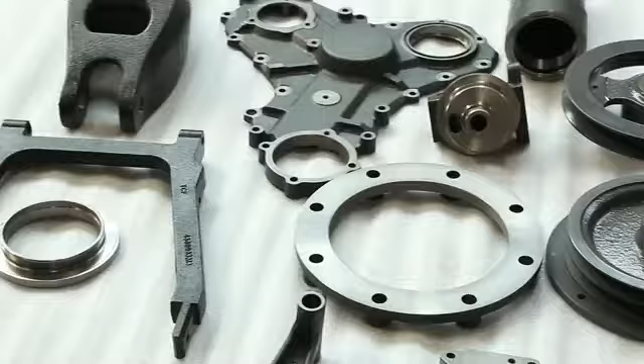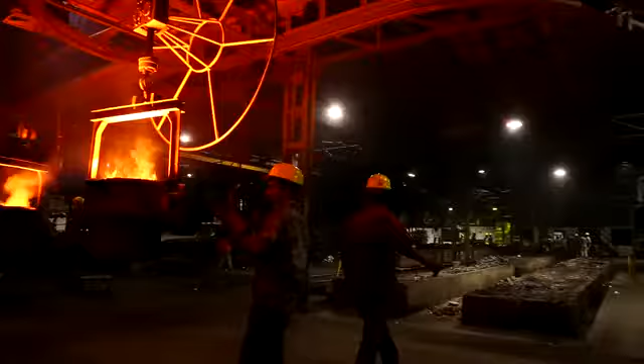Technocast Foundry is an ISO certified company specializing in manufacturing gray and ductile iron castings. An astonishing 12,000 tons capacity foundry and a spare capacity of 4,000 tons per annum. Situated in Coimbatore, considered to be the Manchester of South India for its robust industrial enterprises, Technocast Foundry stands tall among metallic manufacturers.

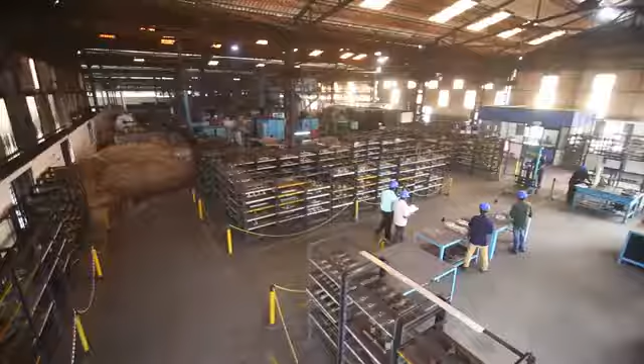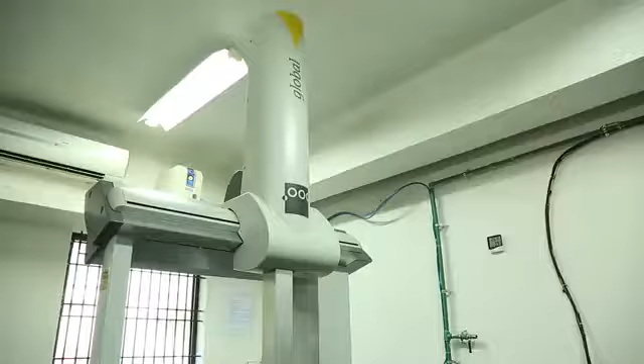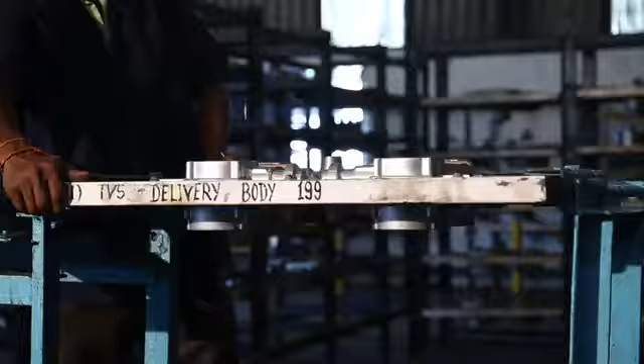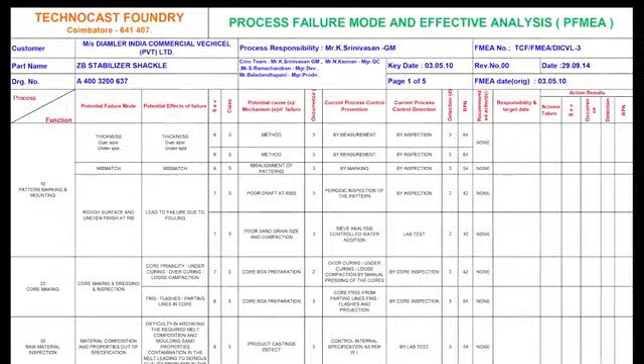Pattern Shop. The Pattern Shop is fitted with tool development supported with CAD/CAM and AutoCast simulation software facilities that minimize the development time and improve efficiency. CMM that inspects the first sample dimensions. To keep track of the patterns, we maintain an efficient pattern storage area. We are capable of submitting all the parts with APQP, FMEA, Control Plan, SPC, MSA, PSW and PPAP.

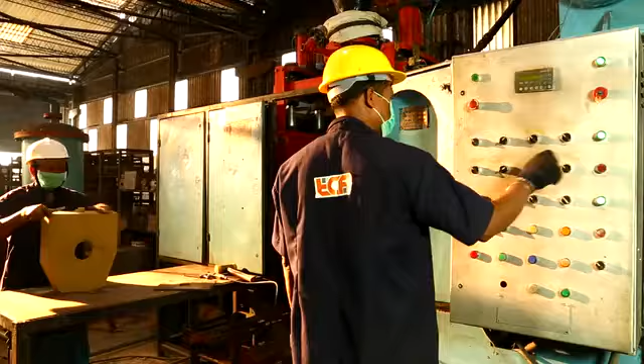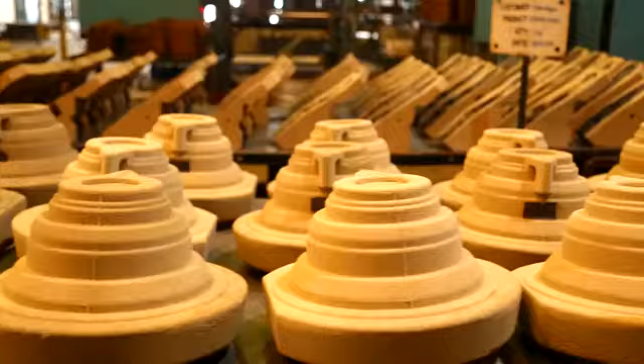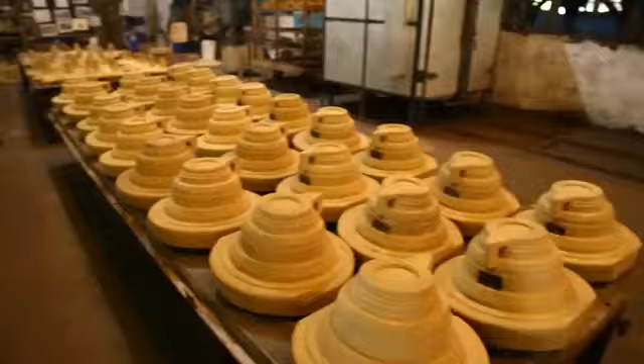Core Shop. The Core Shop contains a shell core shooter with a capacity of 5 kilograms, cold box core shooters of 5 kilograms, 10 kilograms and 15 kilograms capacity, and a core sand dryer with a capacity of 2 tons per hour, heating oven for baking the cores, and proper storage provisions of the cores.

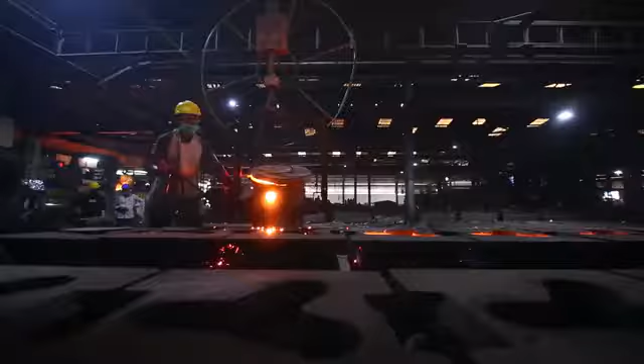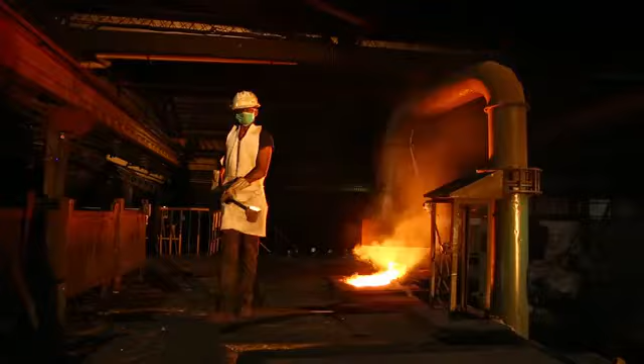Melting Shop. The melting shop comprises 2 medium frequency induction furnaces of Inductotherm make, 3-ton EOT cranes with 1-ton treatment ladles, automatic timer that monitors the pouring time for SG iron castings, digital display of spectral results in the melting platform, and grade-wise storage of inoculants.

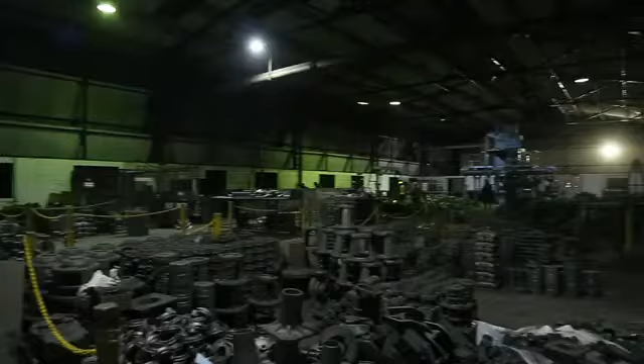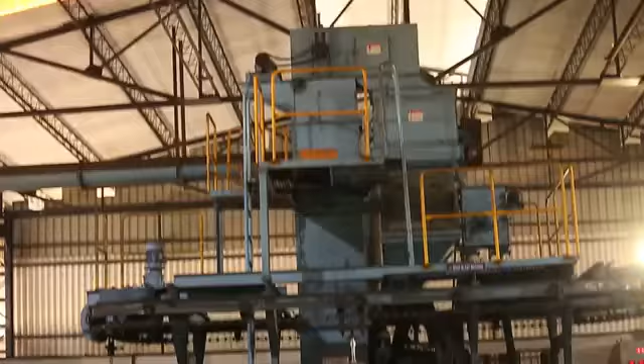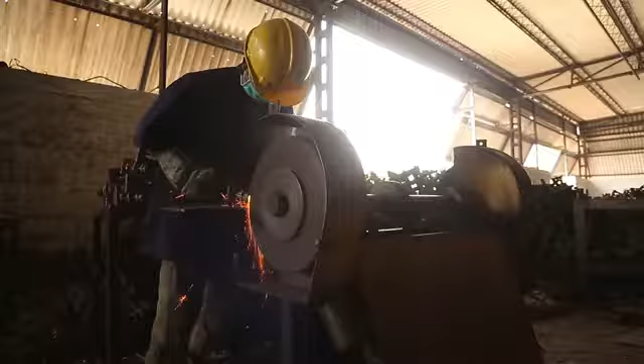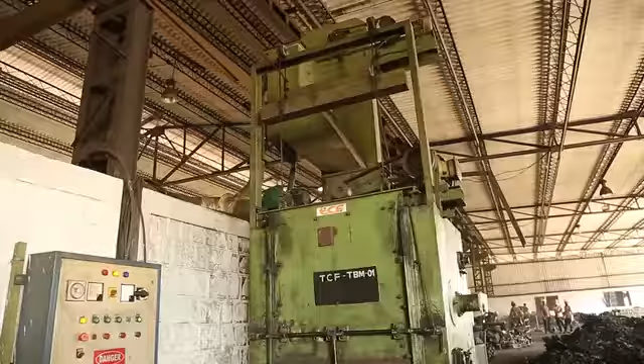Fettling Shop. A high-end fettling shop with a work area of 2,400 square meters, making sure the post-production processes take place effectively. The fettling shop is incorporated with 2 numbers of 500 kilogram capacity shot blasting machines, 10 bench grinders, 2 swing frame grinders supported by a combination of pneumatic grinders, 60-ton capacity trimming machines, 300 kilograms capacity tumble blasting machines, and nozzle blasting machines that clean intricate and complex core holes.

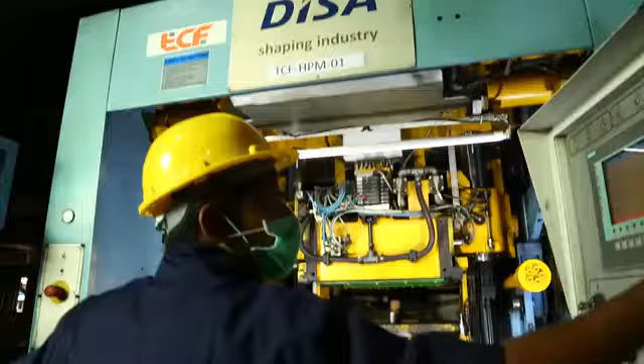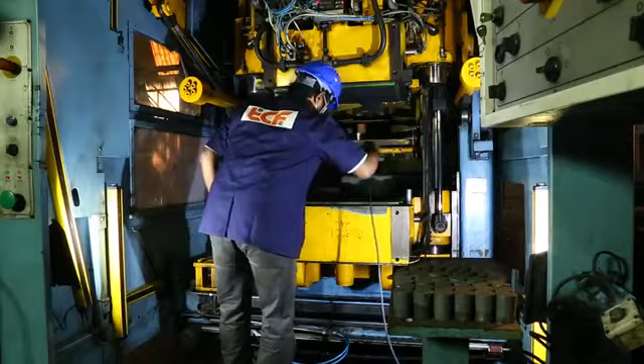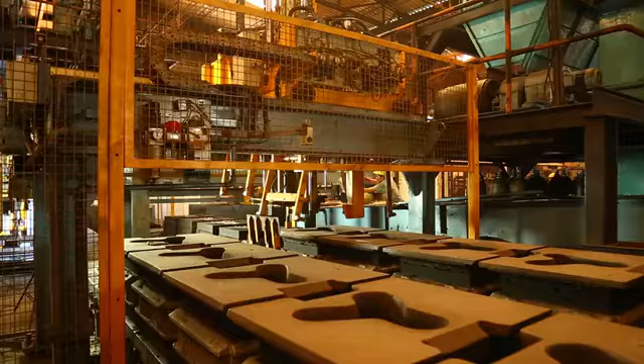High pressure molding line. Technocast Foundry has invested in state-of-the-art machinery such as the DISA Match 20x24 with automatic core setter for producing molds with exceptional dimensional accuracy and superior surface finish. Highly intricate castings are possible in a very short span of time using the DISA HPML molding technology with a high productivity rate of up to 180 molds per hour.

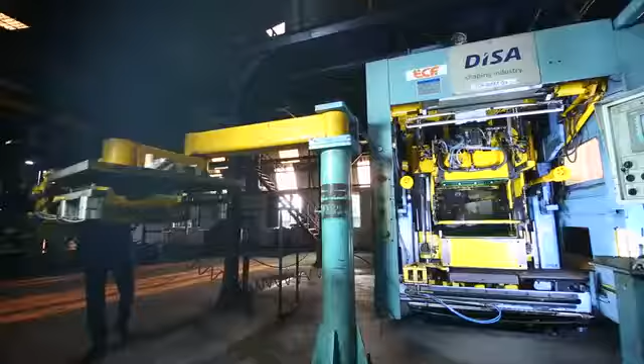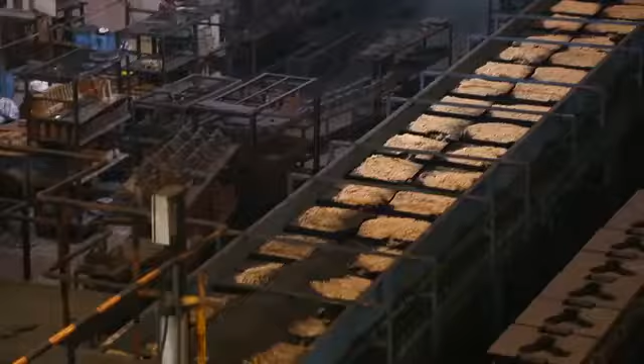Complicated self-core castings, which require meticulous and time-consuming effort, are easily developed with this technology with no or very minimal mismatch rates. Change in patterns is easily done without loss of production with the help of the quick pattern changing device. This allows us to manufacture products of all volumes without hindering the productivity rate.

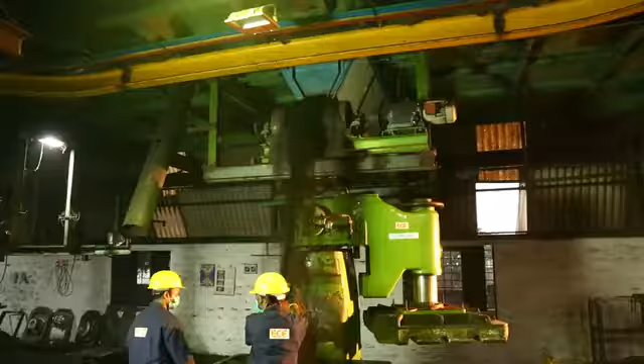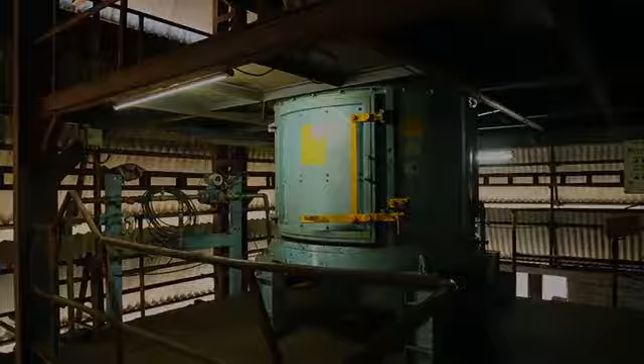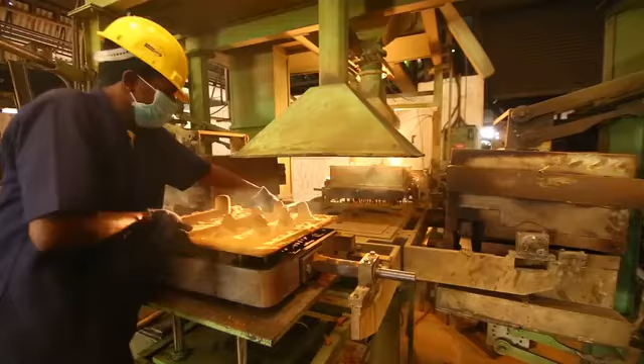Sand plant. The automatic high pressure molding line is optimized with a 40-ton per hour sand plant with a complete dust collection system. Shell molding. 2 4-station shell molding machines are used to manufacture components varying from a weight range of 100 grams to 20 kilograms with mold size dimensions of 480 millimeters by 600 millimeters, with a capacity to produce 1,200 molds per day per machine.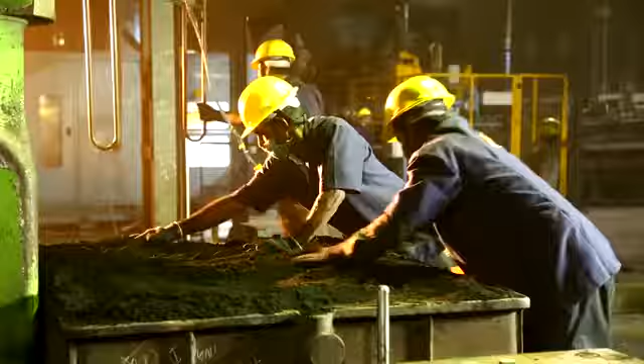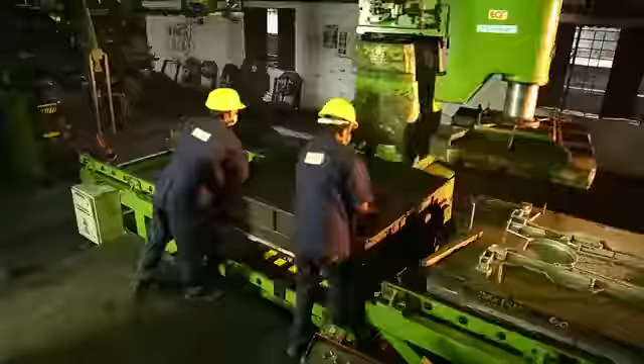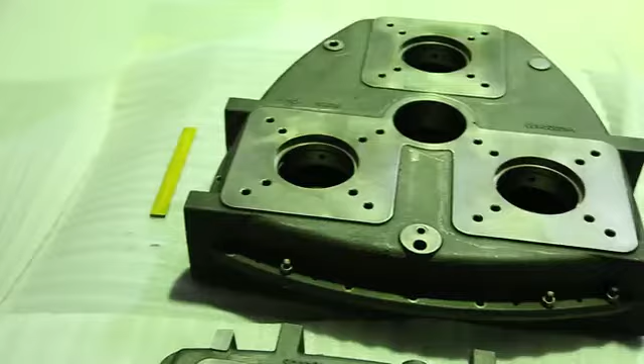The ARPA 450, ARPA 1300. The ARPA 1300 simultaneous jolt squeeze machines can handle box sizes of 1000 by 1200 by 350 millimeters by 2 with the capacity to produce single piece castings that weigh up to 350 kilograms. The DISA ARPA 450 can handle box size of 650 by 700 by 200 millimeters by 2 with the capacity to produce single piece castings that weigh up to 100 kilograms.

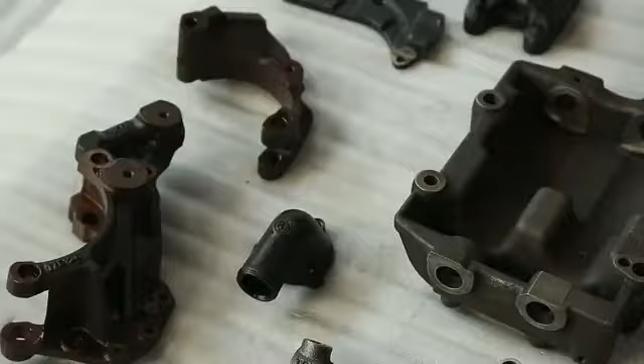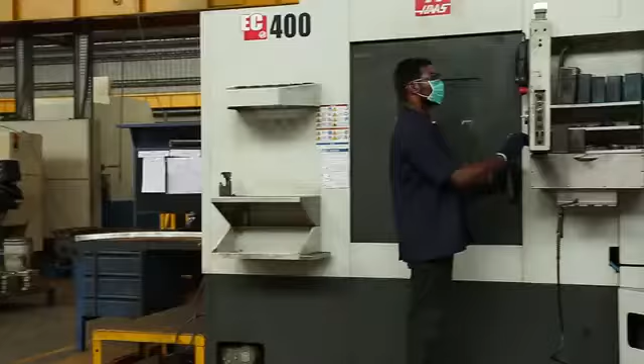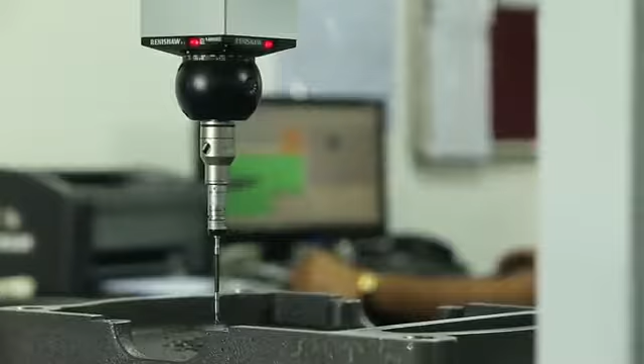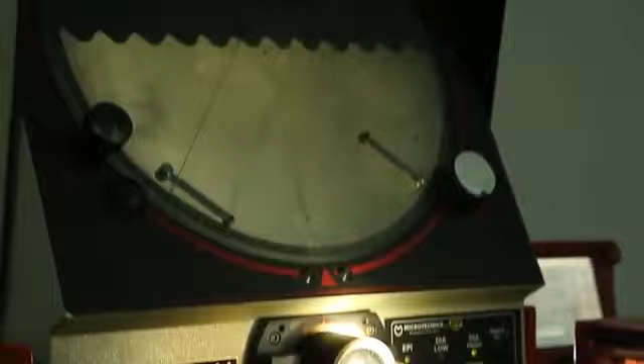Machine shop. The machine shop is geared with 28 CNC machines working round the clock. The machines include 2 HMCs of Doosan and Haas USA make, VTL of Doosan and Hwacheon make, 15 VMC, 9 turning centers, a dynamic balancing machine and a high pressure jet washing machine, CMM of Brown and Sharpe make with a size of 700 millimeters by 1000 millimeters by 660 millimeters, 2D Height Master of Electronica make, a profile projector and surface roughness tester for Ra inspection.

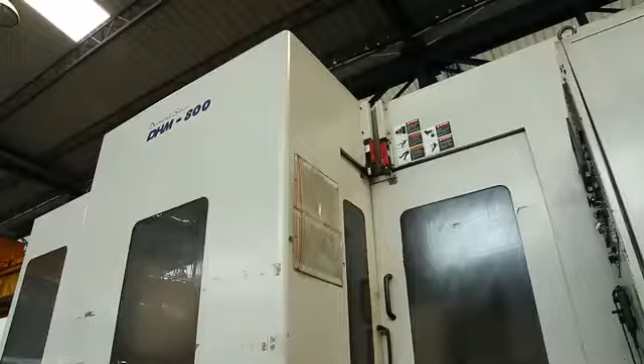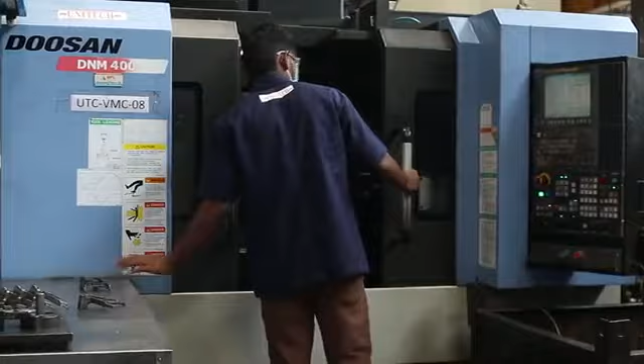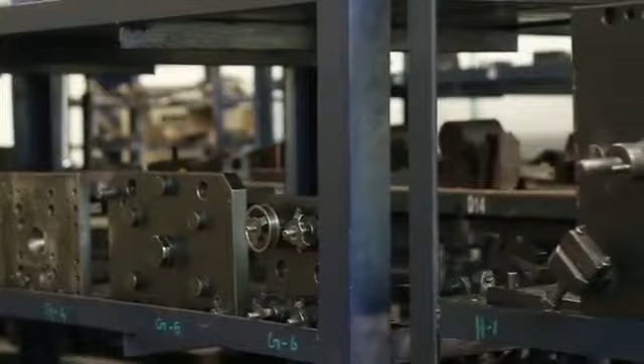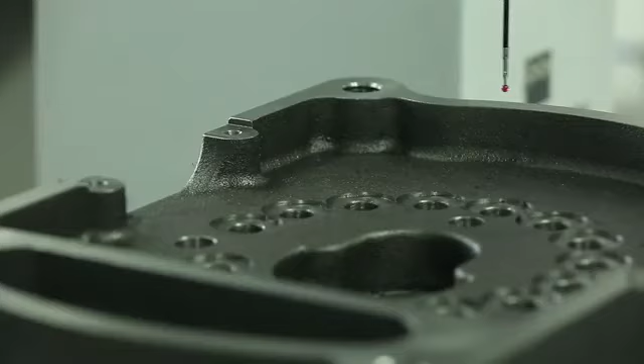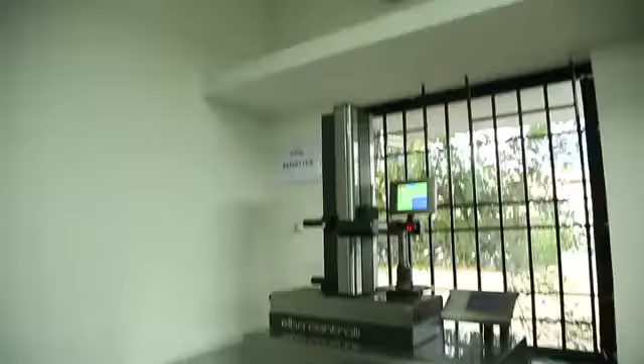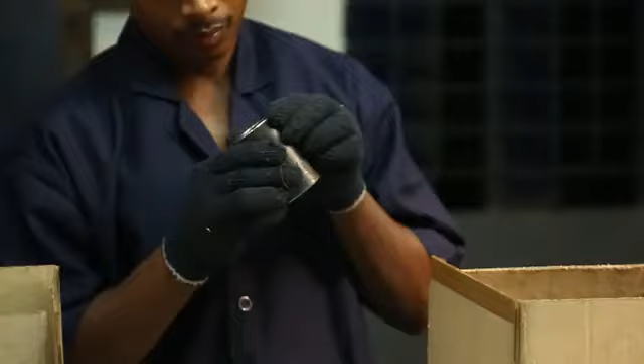Inspection facilities. Our inspection facilities include coordinate measuring machine of Brown and Sharpe USA, Global Performance make with operating specifications of 700 by 1000 by 660 millimeters. Inspection fixtures, profile projector of Microtechnic Italy make, tool presetter, contour analyzer machine and millipore tester. The inspection activities include surface table inspection and 100% visual gauge inspection.

Over the years, Technocast Foundry has grown from strength to strength, renewing the standards of excellence in the metal industry. A forerunner since its inception, Technocast Foundry has been garnered with various prestigious accolades such as Star Export House by the Ministry of Commerce and Industry and the Best Supplier Award from TAFE for the year 2015.